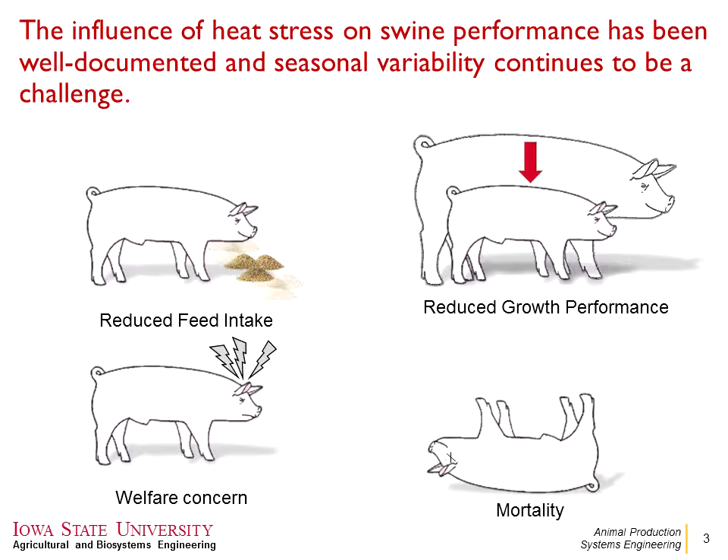So without further ado, the impact of heat stress - I think this is pretty well known and gets reiterated all the time, but just to make the point: reduced feed intake, reduced growth performance, it's a welfare concern, it's a stressor, and it can lead to mortality. All things that are bad, and we want to avoid them. As we see from finishing weight, this is from the pork industry analysis in 2015.

We see in the late summer months, as you know, we currently sit right on the edge of June and July, and we start to see finishing weight start to decrease, well below average. We see average daily gain again dip well below average in those late summer months. We know it's an issue.

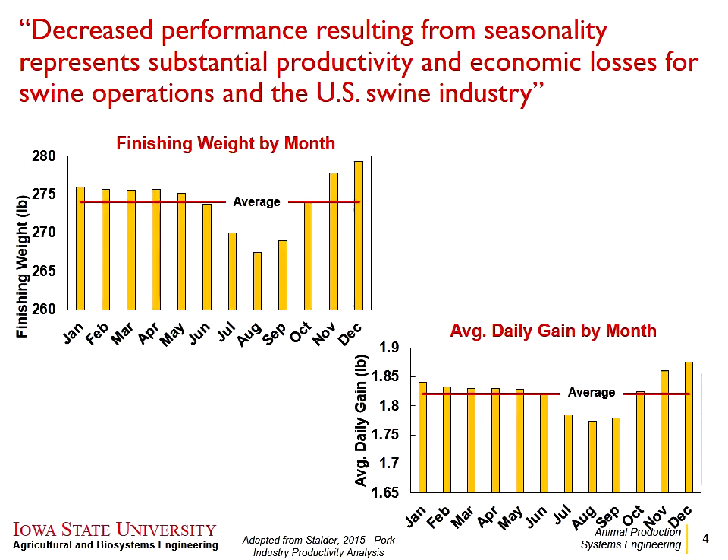Seasonal variability continues to be a challenge today, and if you could increase that finishing weight 1 pound during those months, you could have an increase of $550 for every 1,000 pigs raised. So there's a lot of money on the line when it comes to decreasing the impact of heat stress.

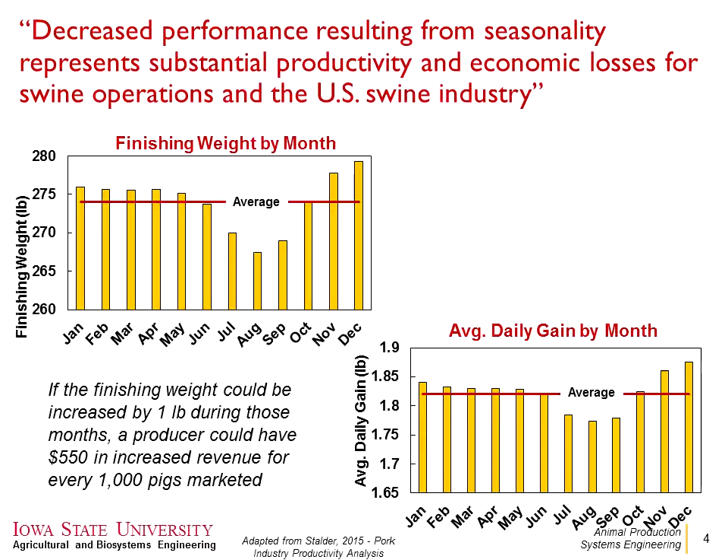Also, looking at the impact on the breeding herd, it's a delayed response as those warm summer months come in, and you see the litters affected by boar fertility into the winter.

So what is heat stress? This is more from my engineer's perspective, on the outside of the animal looking in. We have what we call the effective environment - that's kind of the sum of everything around the animal. We'll get into more details, but that's what is affecting the ability for that animal to lose heat, because our job is to pull that heat away.

Core body temperature, normal, is around 39 Celsius for the pig. As it goes through the different zones of thermal regulation, core body temperature drops off when it gets too cold, and goes up when it gets hot. So we have some heat production - this is essentially how much heat the animal is making, and how much heat we need to remove, and we have different mechanisms that the pig can use to regulate itself thermally.

So in the normal thermal neutral environment, we have vasomodification - changing the opening diameter of veins - and behavioral changes, such as huddling, separation, resting, standing, sitting, and moving.

Also, pilo-modification, raising and lowering hair. Not a big deal, but it does add to the animal's ability to cope with its thermal stress.

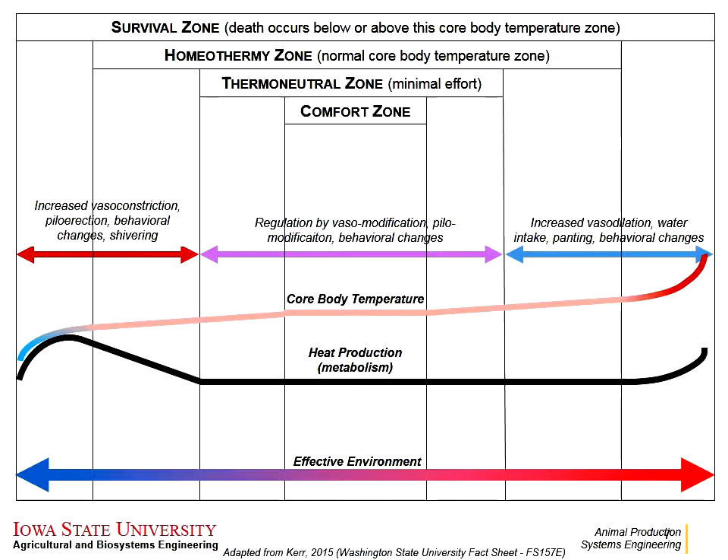On the heat stress side, we see increased vasodilation, pulling as much heat away from the core body temperature as possible. Panting - pigs don't sweat, so they rely on heavy respiration to reduce heat. That respiration works like a big evaporative cool cell inside, using evaporation of water in the lungs to cool themselves down. That's important later when we talk about cooling methods.

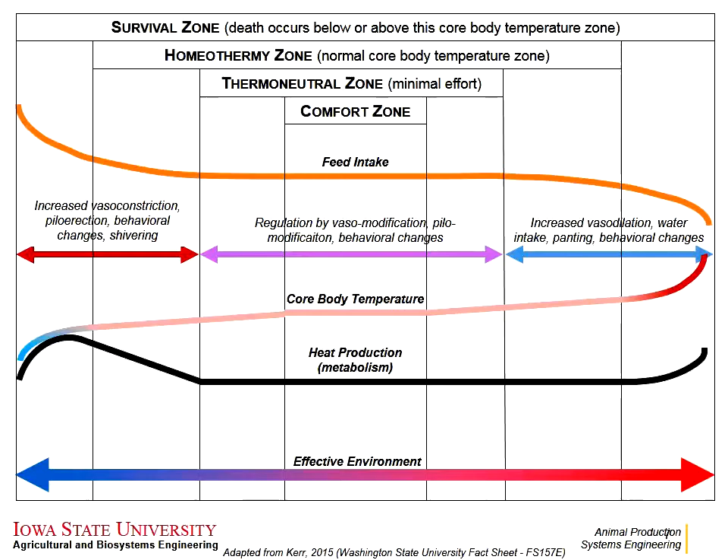Feed intake, as we know, decreases in heat stress. Our goal from the engineer's perspective on the ventilation system is to maintain the animal in this thermal neutral zone. It's a wide range, different for every animal. There's no set zone that's ideal, but be aware that it's changing - it changes per barn, per conditions, per everything that affects where this zone lines up for each animal.

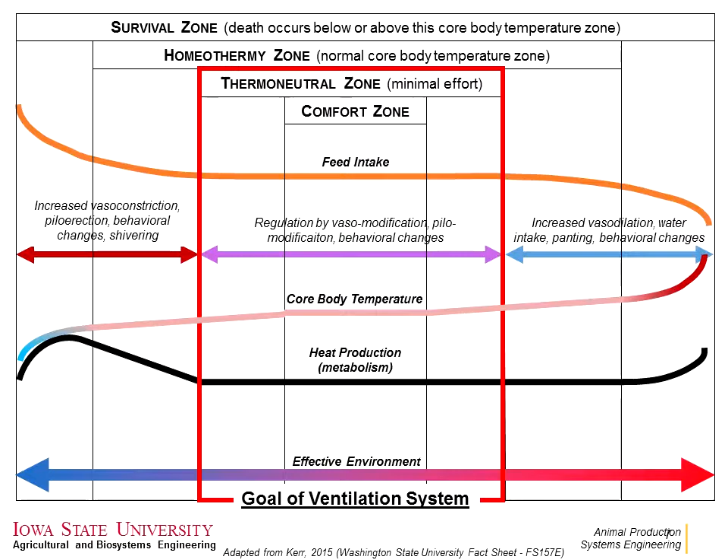Heat stress is on the other side of that zone when it's too warm. In an effective environment, too much heat is being added to the animal, and our job is to minimize that.

Briefly on thermal exchange, pigs, just like all animals, us too, mammals, all homeotherms, we all strive to keep a constant core body temperature. That's as a result of basal metabolism, trying to obtain nutrients, heat increment from feeding, combating stresses, which can divert energy, which is also attributed to a poor environment.

Either on the hot or cold side - to put that in perspective of how much energy heat a pig is producing: a 220-pound pig at 61 Fahrenheit produces around 876 BTUs per hour. When you multiply that out by 1,200 in a room, that's a lot of energy being added to that room that all has to be taken out.

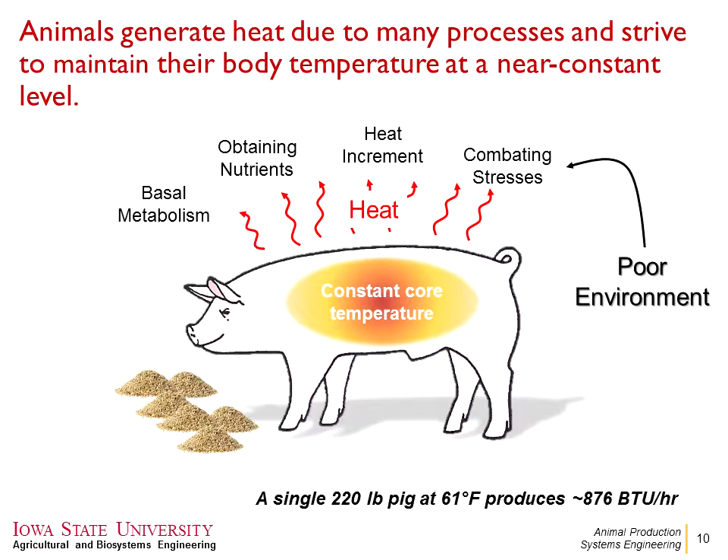So briefly, an animal exchanges heat with its surroundings. Why does that matter? Because this dictates what is the best way to cool pigs, and understanding what mechanisms you need to rely on to take that heat away most effectively.

We have 4 different modes. Conduction is through the floor - direct contact, or through any surface. We have forced convection, think about high air speeds, essentially tunnel ventilation - as the air moves over the pig, it takes heat away. Natural convection is more during a colder environment, where heat just naturally rises, as many of us have seen.

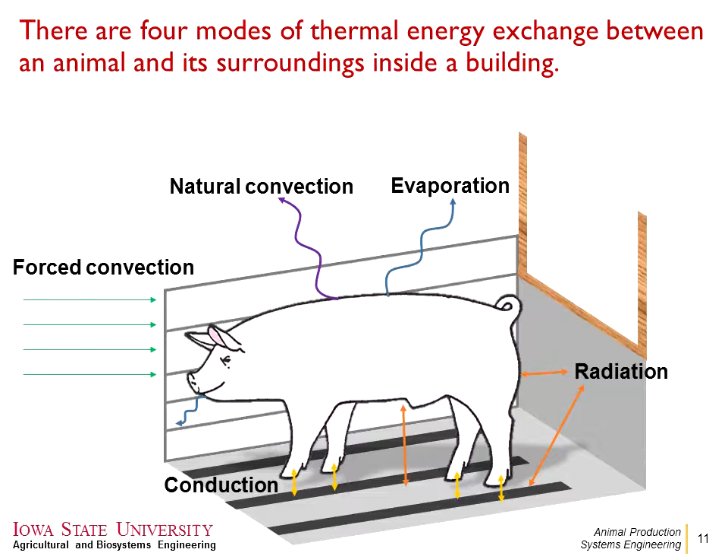We have evaporation - think about panting as a mode of evaporation inside the lungs, or wet skin from sprinkling or sweating is another way to rely on evaporation. Then we have thermal radiation, a little harder to understand because it's just the exchange of energy with all of your surroundings. As everybody packs in close but not touching, you feel warmer - that's thermal radiation exchange. Or if you're near a cold window and put your hand out, that window feels colder without touching it - another form of radiation.

So what does this mean in terms of these modes? How do I understand what they are? That's why all those modes of heat transfer have correlations with different parameters, such as temperature, airspeed, which is a main driver of how we understand how much forced convection heat can take away.

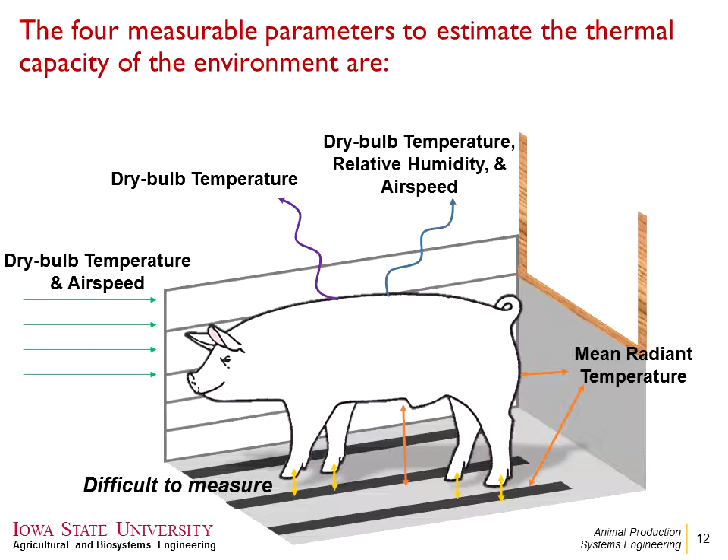Mean radiant temperature is measured with a black globe - it measures the surrounding surface temperatures. Evaporation is driven by temperature, humidity, and air speeds. Conduction is a little difficult to measure - it gets challenging with the pig's body temperature changing and, let's say, floor temperature changing, so it's a bit harder to estimate.

So how do we quantify heat stress? This is from my PhD research - I put together the thermal environment sensor array, which combines the 4 measurements that describe all the different modes of heat transfer into one package. So we have an airspeed sensor that measures airspeed around a big black globe - this is a 4-inch PVC or plastic toilet float from Grainger.

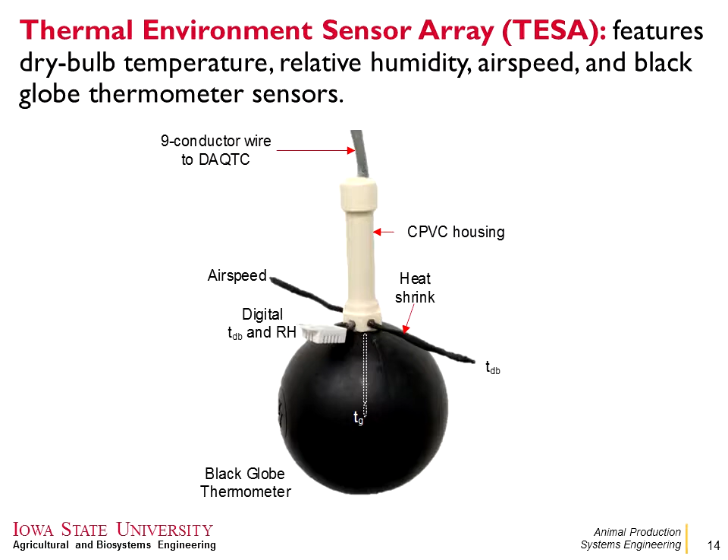It's cheap, it's better than buying a copper one, which is the standard method. We have just a regular temperature sensor and a regular humidity sensor, and then it's kind of packaged together so it all runs back to a system for managing the data.

So another way of thinking about this is how do we take those measurements and actually combine them into something useful? This is a challenge I see with a lot of thermal indexes like the temperature-humidity index, which only looks at 2 parts of the system when in reality there are really 4 different parts involved.

So we came up with something called the housed swine heat stress index. The paper is currently under review. It basically combines the 4 measurements on the previous slide, plus has an option for wetted skin, so if you want to see how your system is working even with sprinklers, it has the ability to adjust.

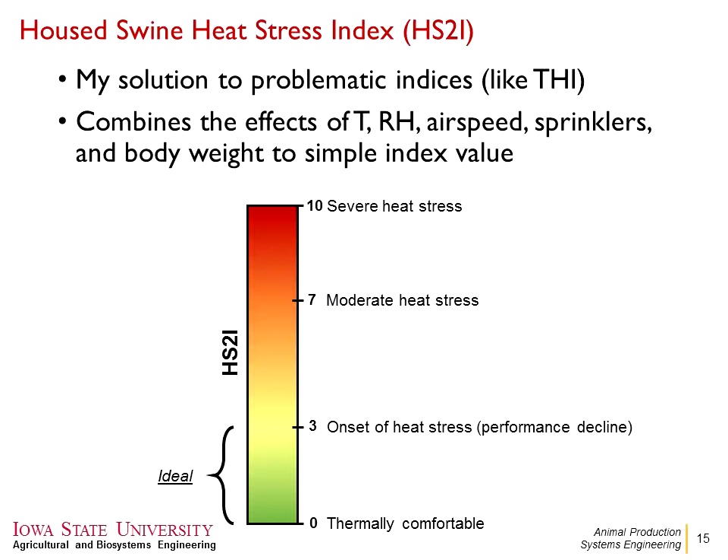Essentially, this index scales from 0 to 10, with 0 to 3 being the ideal thermal conditions, 3 to 7 moderate, and 10 being very severe. So we use this as a method of quantifying and indicating how heat stressed pigs might be. So putting this all into something a little more practical.

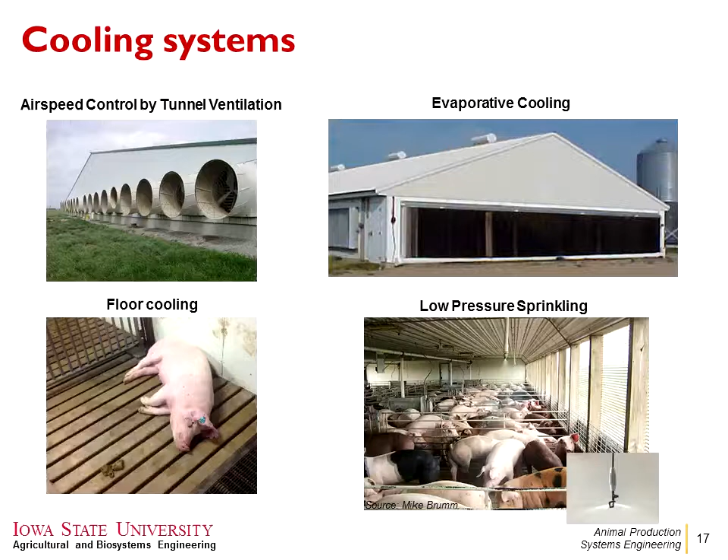I'm going to go through briefly these different cooling systems. First one being airspeed by tunnel ventilation, evaporative cooling with evaporative cool cell pads, which is more indirect cooling. Low pressure sprinkling, which is direct evaporative cooling right off the skin of the animal. And then I'll briefly mention floor cooling, as some manufacturers are having slats with circulating water.

So the first goal here with airspeed and tunnel ventilation is really to develop a high wind speed across the animal for increasing convective heat loss.

So in the graph, I have an example of our airspeed as it increases, and the effective temperature, which again is just a way to combine the different modes of heat transfer into something relatable. Now, 1 degree effective temperature is not the same as 1 degree regular air temperature. That's the combination of everything.

So we see for our small 44-pound pig, the effective temperature is much lower at, let's say, a typical tunnel speed around 350 to 400, versus a 220-pound pig. Smaller pig, larger surface area to volume ratio compared to the bigger pig.

So as I explained, surface to volume area ratio decreases. This is an important part, especially on the very small end for weaned pigs. This is a critical aspect that has to always be considered, as those small pigs can lose heat so fast with the environment. Great care is always needed to make sure they stay warm.

So what happens if the air temperature is 95 degrees, like it will be, I think, on Saturday? It's supposed to get pretty hot here. Now what happens to the effective temperature?

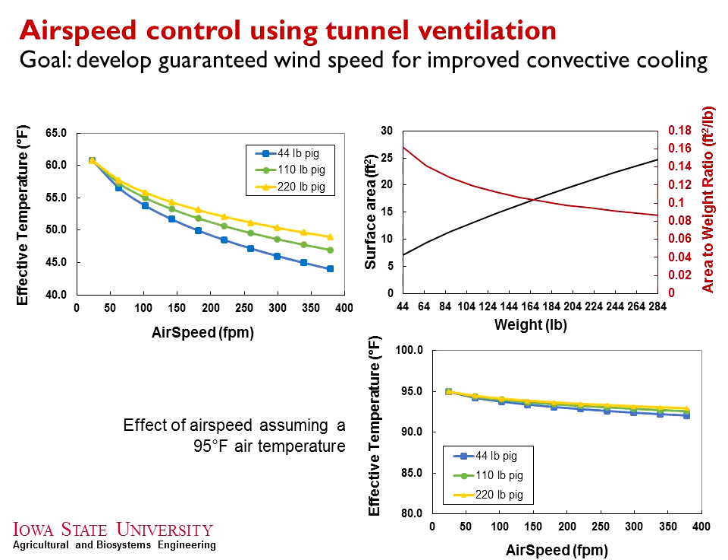So another common issue with tunnel ventilation is heat accumulation down the length of the barn. This is a modeled barn, assuming a certain amount of heat production per pen as you go down the length of the building, and it shows at different air speeds how far away from the tunnel inlet you are, and what that increase in temperature is.

We typically recommend less than a 4 to 5 degree Fahrenheit temperature rise down the length of the barn, which assures adequate air exchanges in the building. So looking at 200 feet per minute, it's close to about a 4 degree temperature rise at only 150 feet. Most buildings being in this range, right about 400 feet, 2 meters per second is the common goal. Versus if you go up to 1,000 feet, you can keep it under a 4 degree temperature rise down the length of the building, but at what cost on your fans and static pressure across the building envelope.

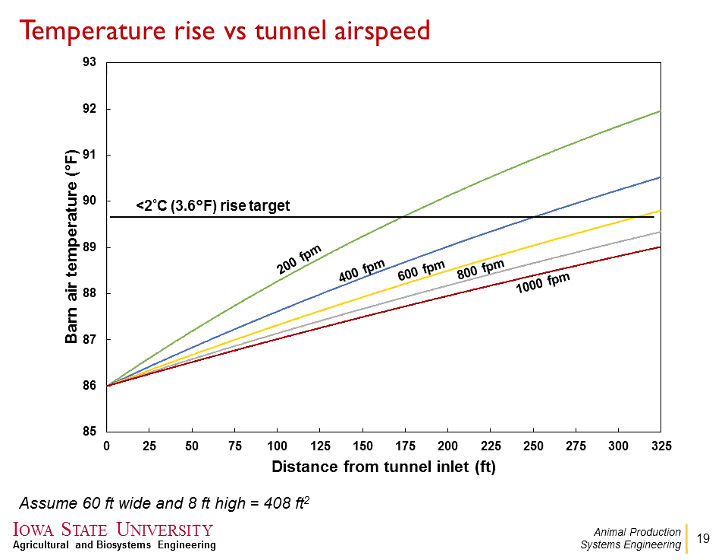Same with fans, you can keep adding fans, but that cost to operate those fans grows exponentially as your static pressure increases, which drives your fan capacity down, which decreases your fan efficiency. And so you have to keep adding fans. There's a tipping point where you're exponentially increasing power and money to operate those fans, but not really getting the benefit in cooling the animals.

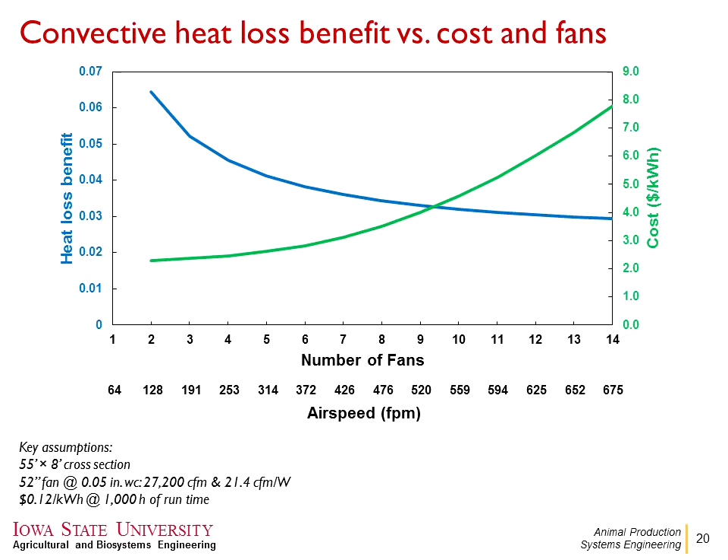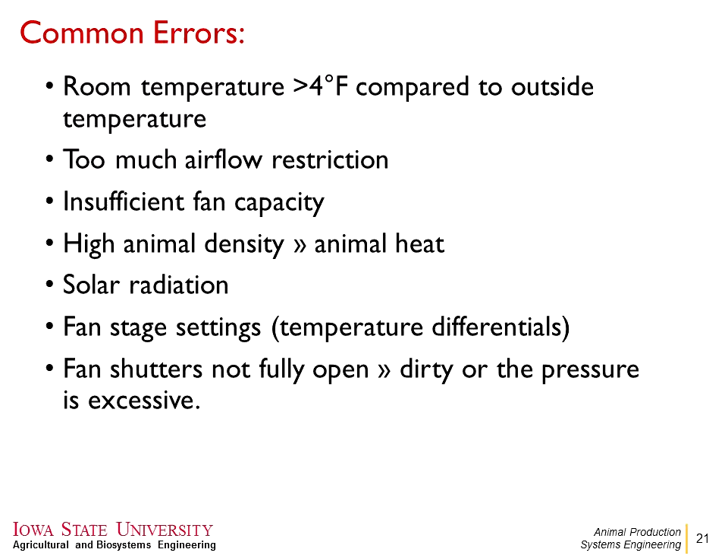Solar radiation, a lack of insulation in the ceiling, or compressed insulation where it's no longer providing the insulated value that it was intended. Fan stage settings sometimes get off and need to be reset and refigured out for what the temperature differential needs to be. Sometimes fan shutters aren't fully open or are dirty, just flapping and not well pulled open, which is usually an indicator that they need to be cleaned in order to get that fan capacity back up.

So how do we prevent it, or how do we understand if we have a problem? Measuring. You don't know till you measure. You can measure temperature down the length of the building, which most sensors are already there if you can pull the information off the controller, or physically walk down the barn with something like a Kestrel meter that does airspeed, temperature, and humidity, a pretty easy, fairly inexpensive way to get some feedback on what's going on in the barn.

Verify airspeeds at the tunnel inlet and also about 5 to 10 feet from the sidewall. As that air comes down through the tunnel, it accelerates in the middle, so you want to make sure you get at the right spot on the cross-section of the barn to make sure you're getting something reflective of what the pigs are seeing or experiencing in the room.

Checking variable speed setting controls, make sure everything's lined up right. And then verifying tunnel curtain opening and static pressure and temperature, making sure the tunnel curtain is opening enough when those later fan stages kick on, so there's not too much static pressure, which is decreasing capacity for the system.

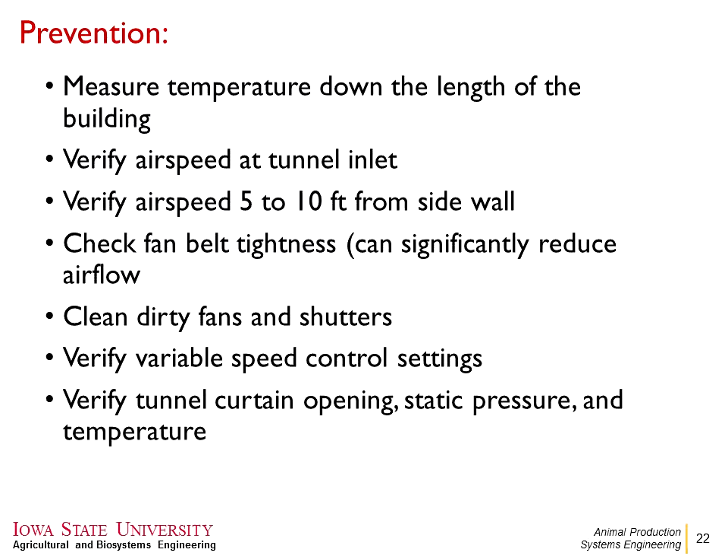So moving away from tunnel, now we'll go into evaporative cooling. Briefly, how does an evaporative pad work? We have air at a certain temperature and humidity that comes into the pad. That temperature decreases as it exits the pad, and consequently the humidity goes up. That water evaporates on the pad itself, and it's pulling energy out of the air, therefore decreasing the temperature, but as the water evaporates, it's got to go somewhere, and it goes into that exiting airstream.

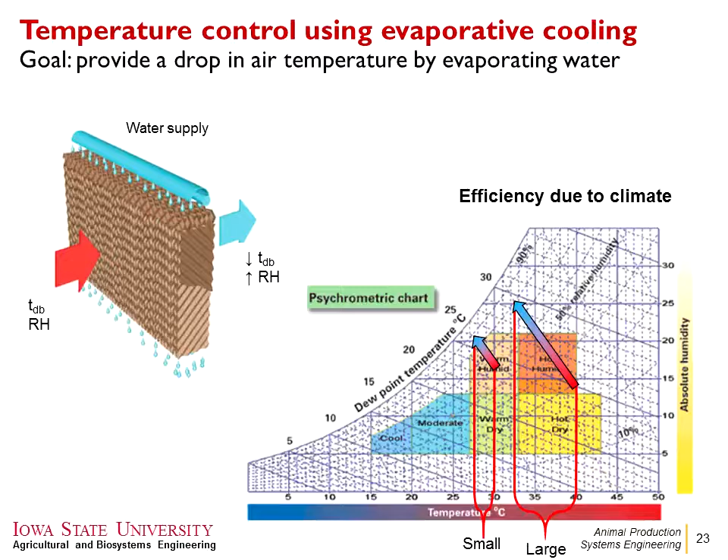So what's the potential of evaporative cooling? It's quite high if you're in a hot and dry climate. Arizona, evaporative cooling has immense potential. Compared to somewhere warm and humid, you only have the potential to reduce a couple of degrees depending on the conditions. But sometimes that might just be enough to reduce heat stress. So it's a balancing act.

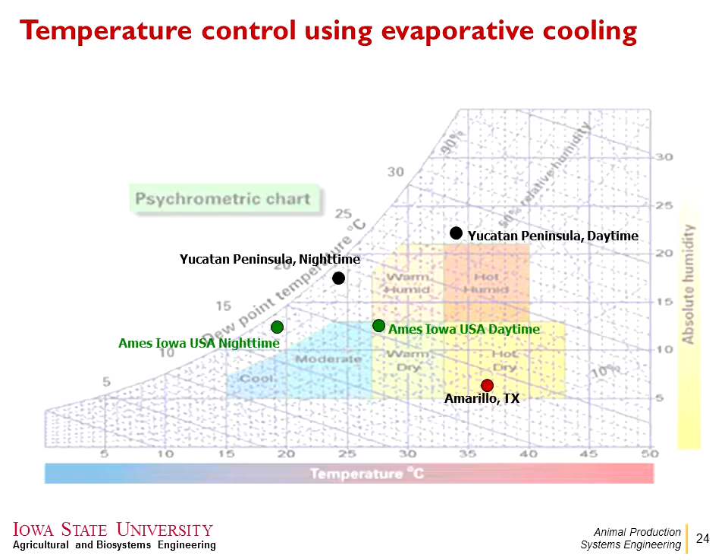So what goes into cool cell efficiency? This is important when it comes to maintenance and getting the most out of the cool cell. Cool cell efficiency is really a function of air face velocity across the cool cell and the width of the cool cell, how thick it is.

If you look at this, a 24-inch cool cell is close to 97% efficient, but that's a 2-foot thick cool cell, and that's just impractical when it comes to implementing, because at 500 feet per minute, the static pressure is over 0.35, which is insane. The amount of fan capacity to pull air through that would be unrealistic.

So looking at the 6-inch cool cell, pretty common, right around 75% efficiency, and most people operate right around 400 feet per minute, which is a reasonable 0.06 inches of water across them.

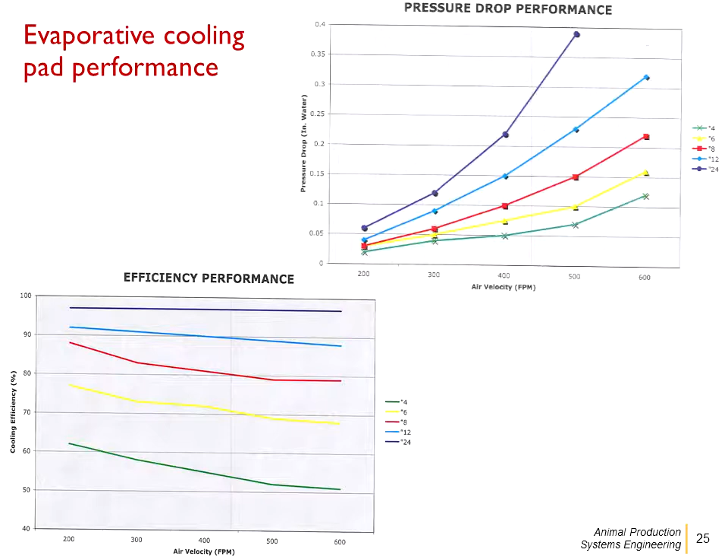Other common errors: pad streaking, usually an indicator of poor water distribution, which could be a result of water pressure, clogs, leaks, etc. Improperly sized pumps that aren't circulating the water to the different nozzles fast enough, clogged strainers that need to be emptied weekly, pad cleanliness, poor water pressure, poor water quality—bleed off or treating the water helps improve quality.

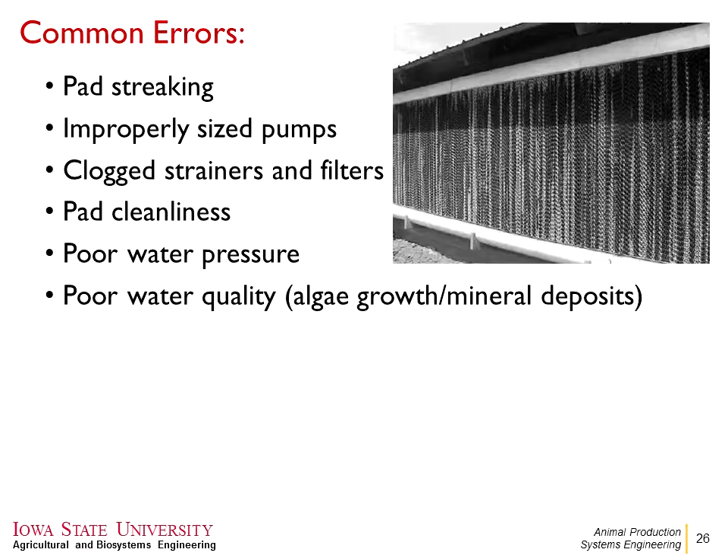So what can you do? Just clean the strainers, clean the pumps, clean out anything that needs to be washed, verify by going out and inspecting the pad. Is there good coverage? Is there streaking, no streaking? You can verify again with a Kestrel meter, face velocity.

This shows an old pad at about 265, and I think on a brand new pad it goes up to 875. Less restriction means more air can flow through, improving the efficiency and helping improve the cooling.

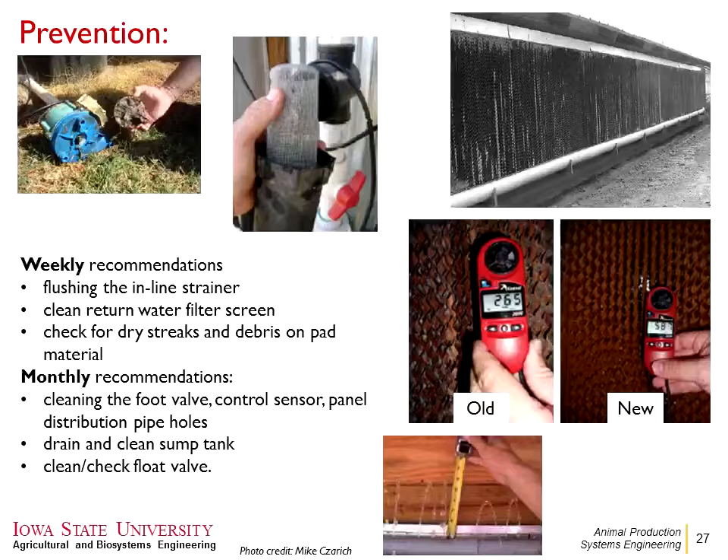So now I'll switch on to sprinklers. The goal here is to wet the animal's back, move air across the animal, and let that water evaporate. As the liquid sits on the skin of the animal, as it evaporates it extracts the heat out of the animal, and the combination of temperature, humidity, and airspeed over the back of the animal dictates how fast that water evaporates and how much cooling potential there is.

If we think about evaporating water, the amount of energy to get that water to change phase from a liquid to a vapor is about 1,000 BTUs per pound of water. So there's an immense potential for removing heat from our high heat producing animals.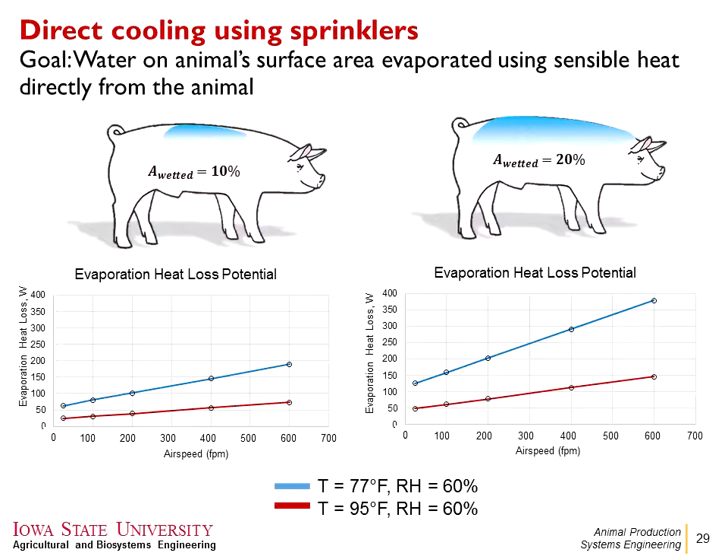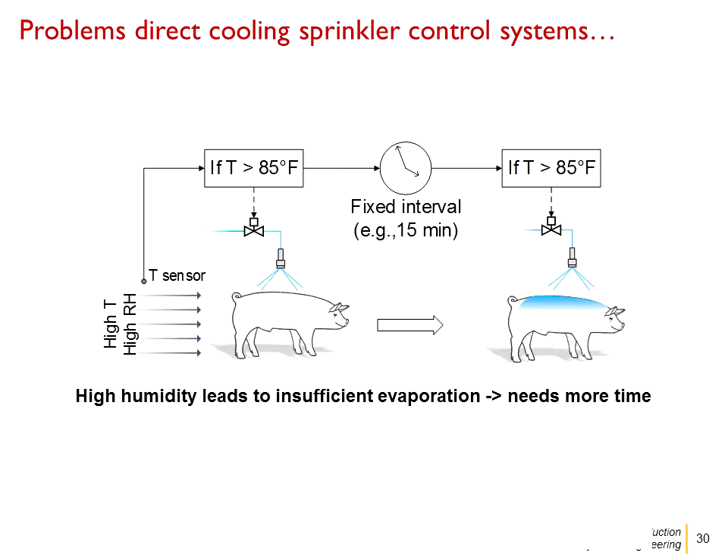Thinking about common problems with sprinkler systems: the lack of information on what the relative humidity in the room is, how much moisture is in there. High humidity leads to insufficient evaporation—if you go outside today and it's muggy, you can tell the water's just not evaporating, so you need more time on the off cycle for the sprinkler.

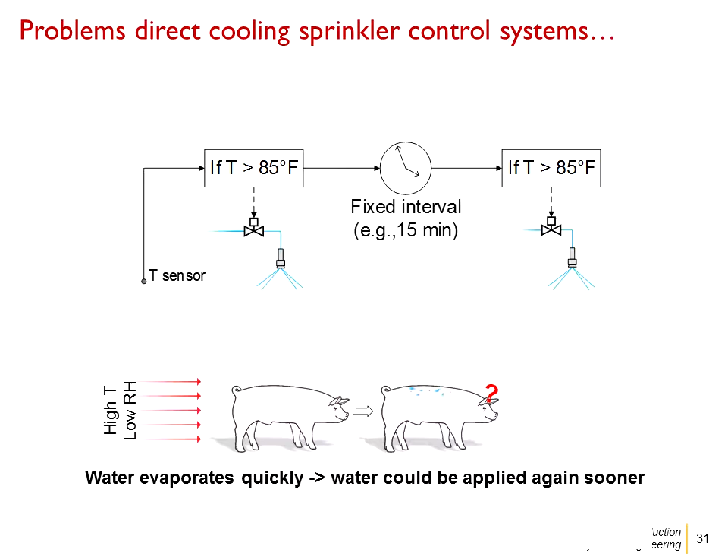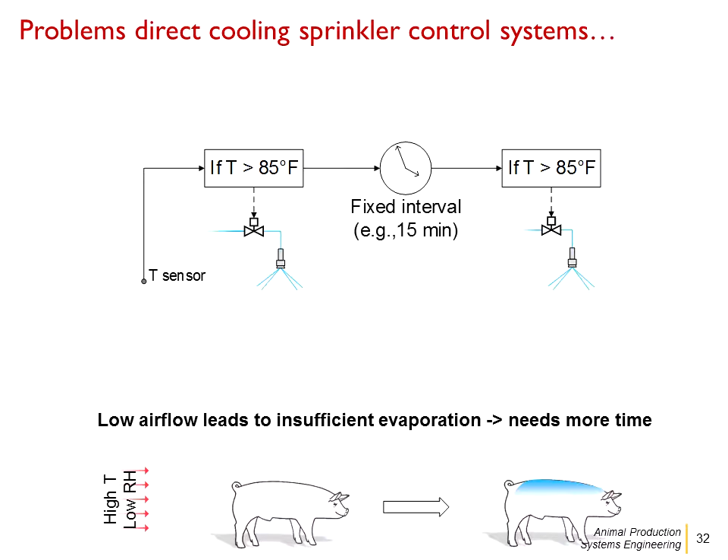Another scenario is the water evaporates too quickly. It could be a dry day, and you can actually shorten that off time to improve the cooling. The sooner you can get the water dried and put more water back on, the more cooling you can provide. One other scenario is low airflow—with lower airflow, less heat is pulled away, and the pig needs more time off. It's hard to judge all these factors without having knowledge of what's going on in the room.

Common errors, similar to the cool cell since they both run on water: clogged strainers, poor water pressure, making sure those nozzles fully get spinning and can throw water. Missing sprinklers—a misting sprinkler that just has a jet shooting straight down isn't helping. It's great for enrichment, but it does not provide much cooling.

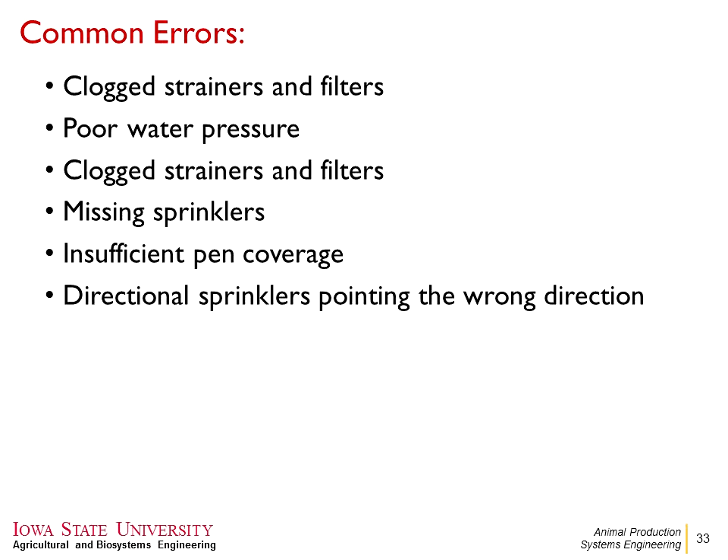Insufficient pen coverage—make sure the pigs can actually get to the water, that if they do need to move around to get to it, they have the ability to get wet and get cooled. And directional sprinklers—again, if the jet is shooting down or pointing at the wall, it doesn't help too much.

So to show how much cooling can be achieved, here's a picture before the sprinklers were turned on, and after turning them on, you can see a significant 3 Celsius decrease in skin temperature, and a nice wetted area on the backs of these pigs as they got wet from the sprinkler. Ben took these pictures, so give credit to him for good camera work.

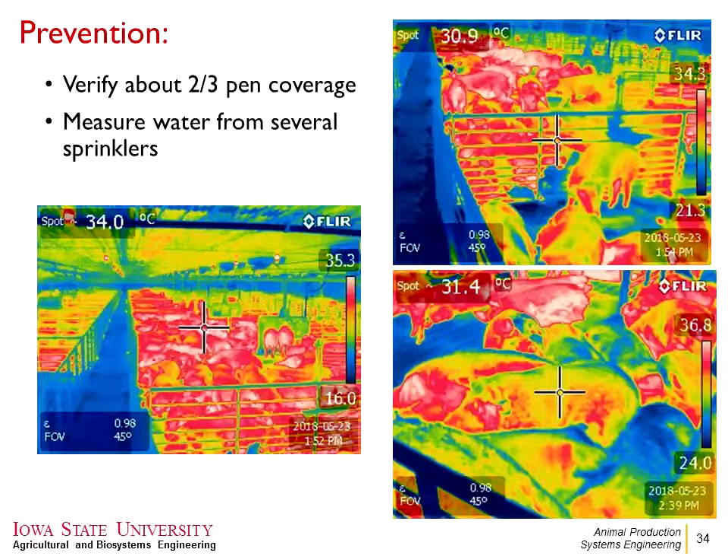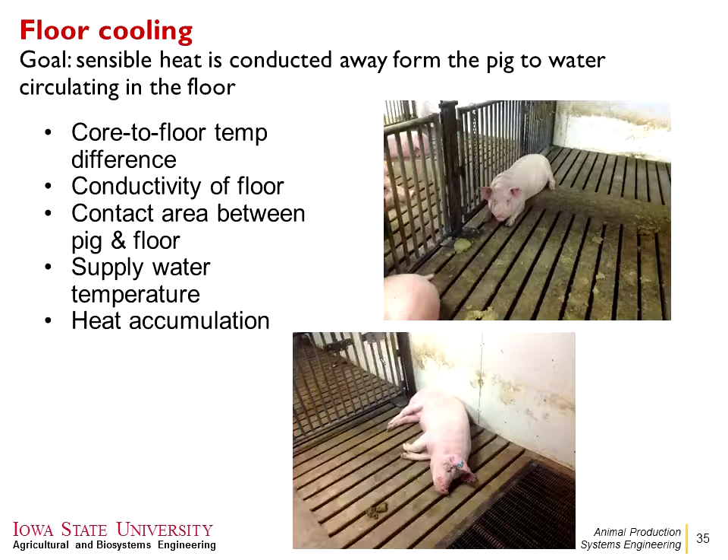The last one is floor cooling. What matters here is core to floor temperature, so how much heat can be exchanged from the core of the animal down to the slats. Contact area, thermal conductivity to the floor, concrete versus plastic, and supply water temperature - if the water's coming in too warm, you can't move too much heat. Then there's heat accumulation: as water snakes through the system it builds up heat as it pulls heat off, so making sure that water can get refreshed and cooled back down.

So the key take-home points on cooling: air temperature maintenance is critical, but it's not everything. Airspeed control alone is also insufficient. It's the combination of everything, and evaporation also needs to be considered as well.

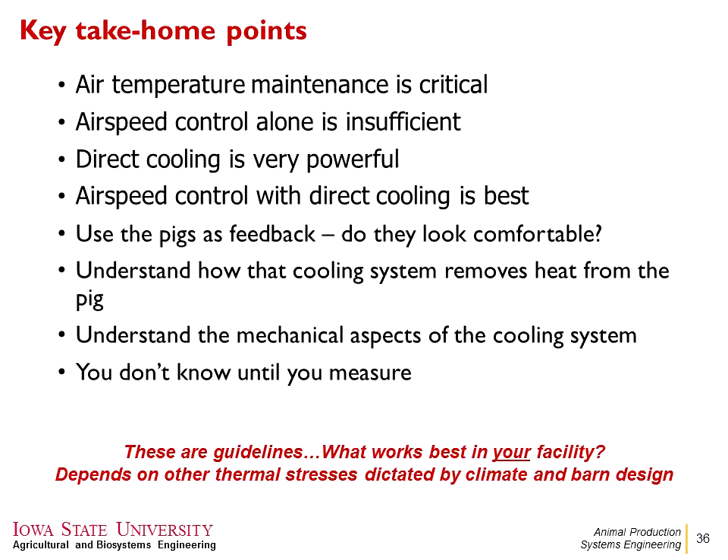Use the pigs as feedback - do they look comfortable? They're usually the best sensor and best indicator in the barn, better than anything digital. Understand how that cooling system removes heat. When you have comprehensive understanding of the different parameters, it helps drive which cooling system is going to work best in my climate, in my facility. Understand the mechanical aspects - pumps, strainers, fittings, nozzles - everything that goes into it to make sure everything's operating the best it can. You don't know till you measure, and it helps provide information.

Now I'll quickly run through, I think I've got about 5 minutes, a couple examples of research projects going on at Iowa State in our department.

Enhancing the health and well-being of pre-weaning piglets - this study is done by Suzanne in the audience, led by Dr. Xin, looking at evaluating the impact of different farrowing crate sizes and layouts with one or two localized heat sources on pre-weaning piglet health and mortality. We're also quantifying postural behaviors as the sow is affected by those crate sizes and heat lamp layouts, and looking at the relationship of surface temperature in piglets and their health status.

We have a Kinect camera mounted over 60 crates doing depth images, so you get a 3D view of each sow and her piglets, and there's also a digital image. We have 3 different stall layouts, all in SI units, so I'm not going to be able to convert those that fast in my head, sorry. We're looking at sow posture - lying, sitting, standing, kneeling - and behaviors such as lying on the left or right side, and udder or back facing a heat lamp.

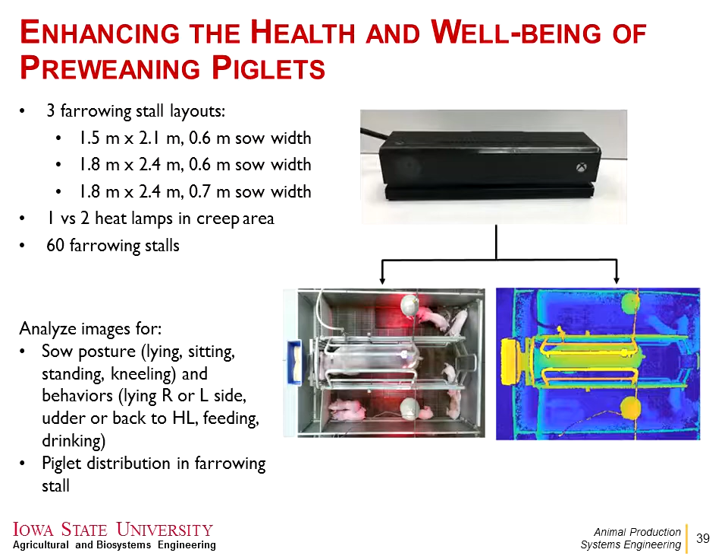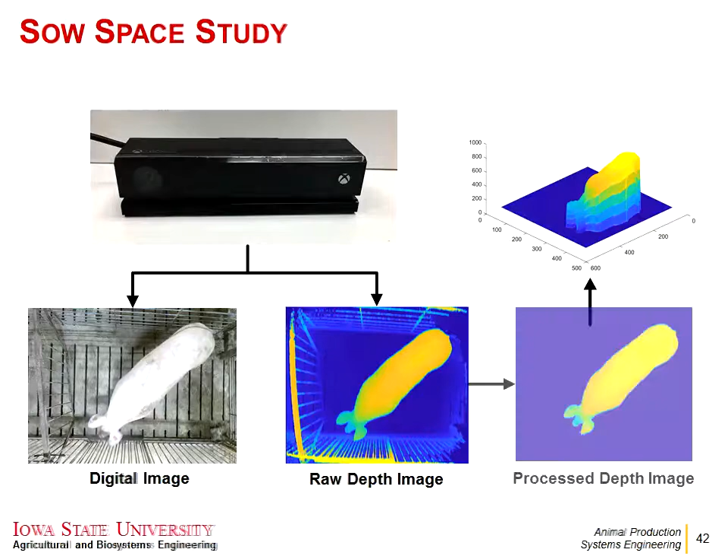Another project, also with Suzanne and Dr. Xin, is a sow space study to determine the commercial sow's static and dynamic space requirements while housed in a pen. Again using a Kinect camera, you get a digital and a depth image, which can be processed into a nice picture that gives a good outline of the sow and her shape - standing, looking at length and width versus lying, length and width - and also looking at the space required when the sow gets up or lays down.

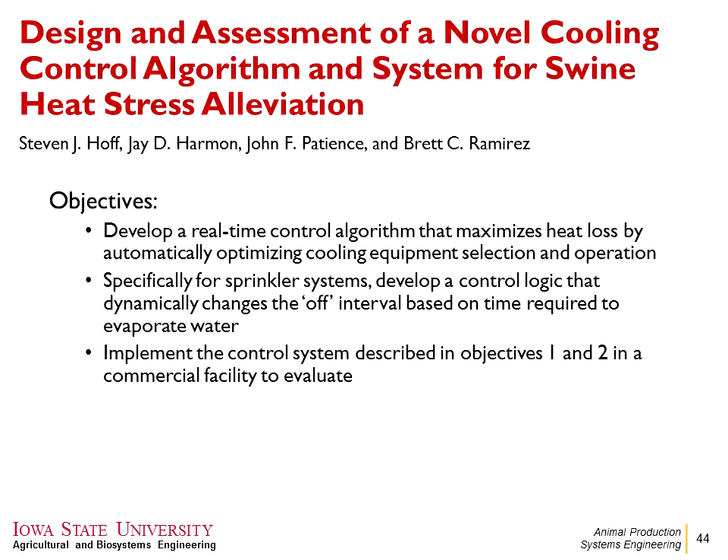My project that I started at the tail end of last year is designing a novel cooling control algorithm for operating evaporative cool cells and sprinklers. Basically this is trying to take in all the climate data and figure out the best times to run the cool cell, since there are some days where it's utterly ineffective to turn them on.

Also looking at trying to find the optimal off time for when sprinklers are on. This is up in northeast Iowa, a quad barn setup with 2 treatments: we're using the cool cell on this side and sprinklers on the 2 south rooms, and that's actually about to get started next week. We're going to be doing animal performance evaluation and also evaluating the effectiveness of my programming capabilities.

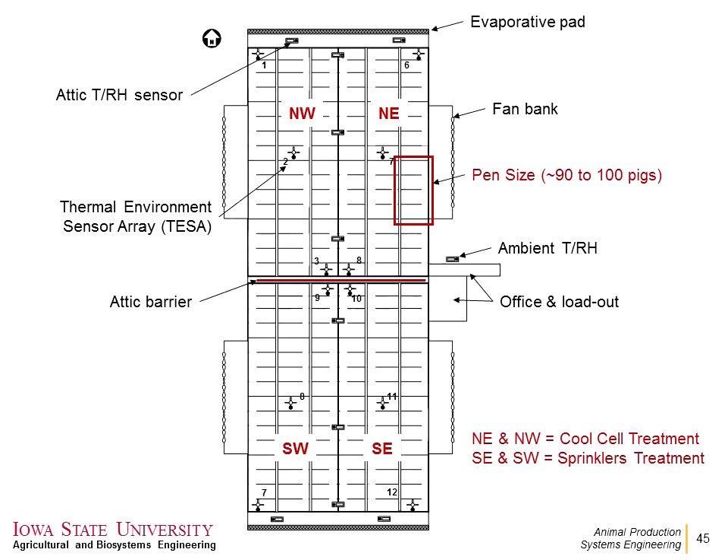So kind of an example from this barn, we have our ambient data, and then we track temperature and humidity in the attic, and as it comes through the inlets, we have 3 of our thermal environment sensor arrays looking at the total environment.

So taking a nice hot and dry day in northeast Iowa, we see a good drop in air temperature as it goes through the cool cell, picks up some heat back into the room, and comes out effectively 10 degrees cooler with some airspeed, so a pretty nice environment. But just to note, it's still at about 70% humidity.

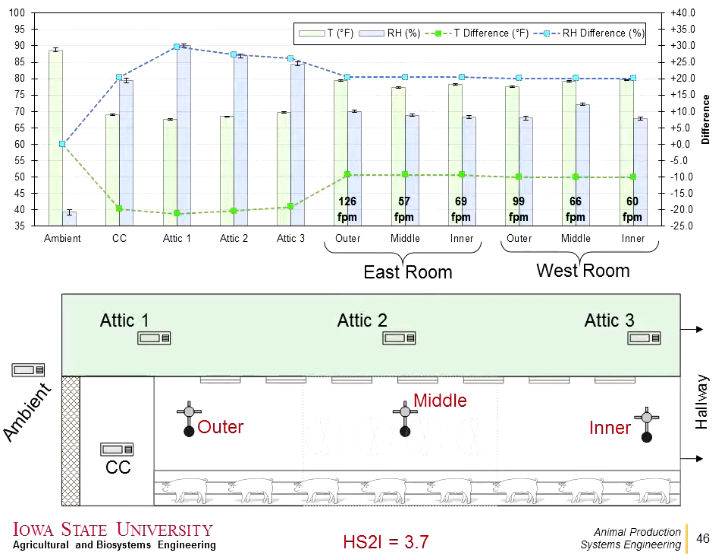Whereas if you get to a hot and humid day, coming out of the cool cell it'd still get a nice 10-degree drop, but by the time it warms back up in the room, you've only dropped about 1.5 degrees Fahrenheit, and you're still sitting about 70 to 80% humidity. At that temperature, the pig is relying on panting and evaporation in its lungs, so that higher humidity can cause issues with the pig trying to cool itself.

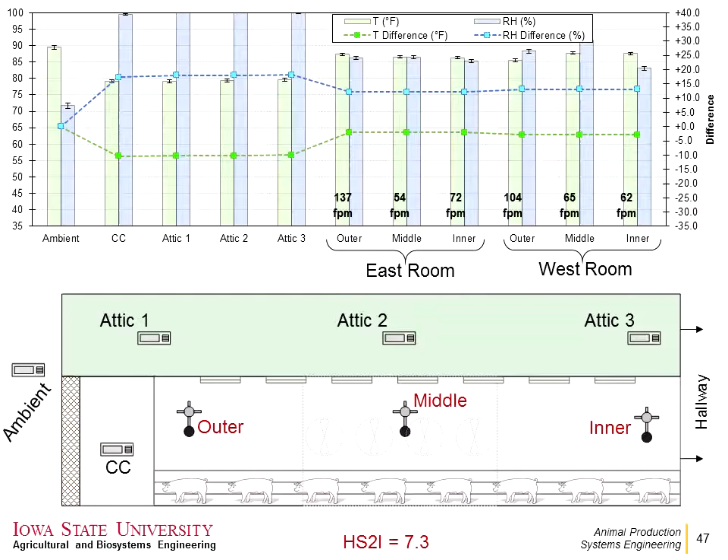So using the swine heat stress index, we got a value of about 3.7 in those conditions and about 7.3 in this condition. So it may have been worth just leaving the cool cell off that day to reduce heat stress. That's all I have. Hopefully you enjoyed it and got some updates on research and learned about cooling. So thank you.